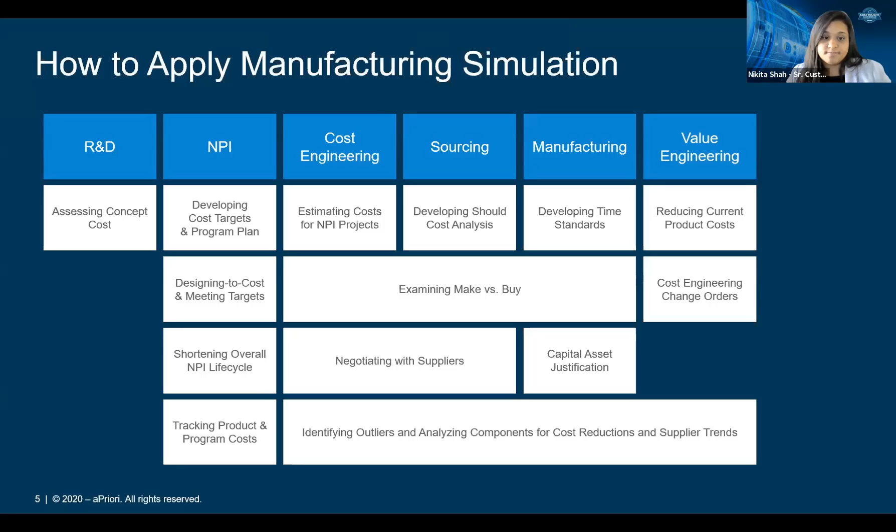Think of should cost as an additional quote from a supplier, which enables fact-based negotiation. You're too high, and this is why. Or here are my assumptions to expected cost. Let's talk about what considerations might be incorrect. You could focus on things like cycle time, machine selection, current manufacturing processes, material utilization, labor, and overhead rates. These are all now elements of the negotiation conversation.

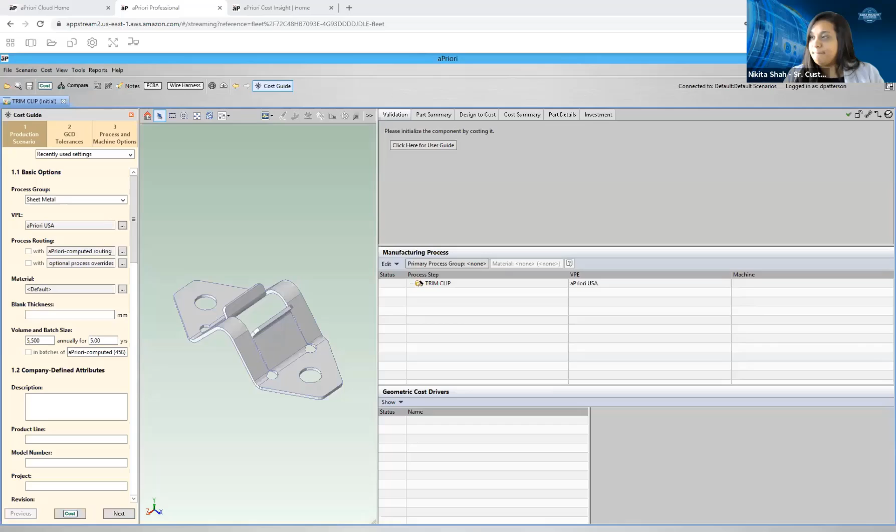Okay, perfect. So I'll walk you through the steps of generating a cost estimate with aPriori, the inputs that were required, and then walk you through analyzing the data that comes out of aPriori. So to generate a cost estimate with aPriori, all you need is the CAD file. You don't need CAD installed on your system or need to know how to use CAD. You just need the ability to point to that CAD file to generate a cost estimate.

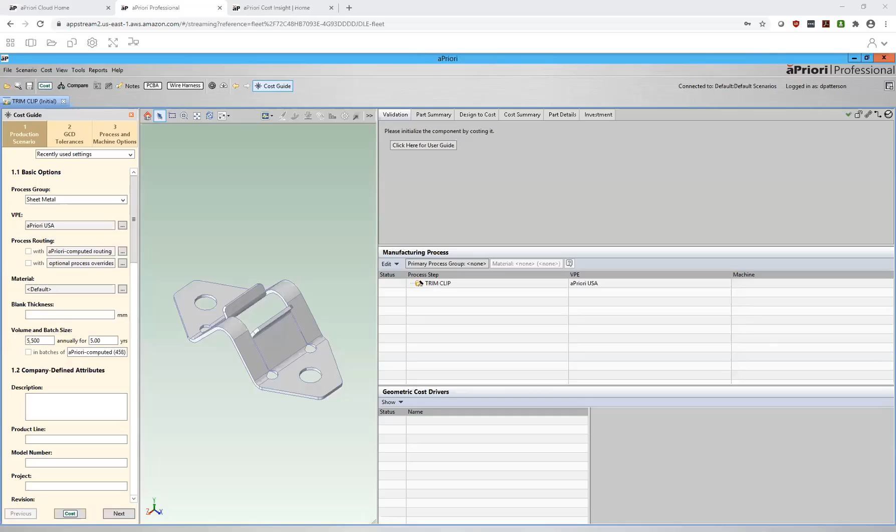So I've gone ahead and pointed to this trim clip. I'll go ahead and answer a few basic questions about the part. The first question is, what's my primary method of manufacturing this part? I need to tell aPriori if this is a sheet metal component or a casting or a plastic component, and I can easily do trade-off scenarios as well. I can look at this across process groups.

So I'll say sheet metal, and then I'll select the digital factory that I'd like to use to manufacture this component in. We have the world broken out into 79 different regions. You'll see regions in the US, Europe, Asia, Africa, and from those regional data libraries, we're pulling in the labor rates, the overhead rates associated with manufacturing in that region. This data gets updated every 90 days.

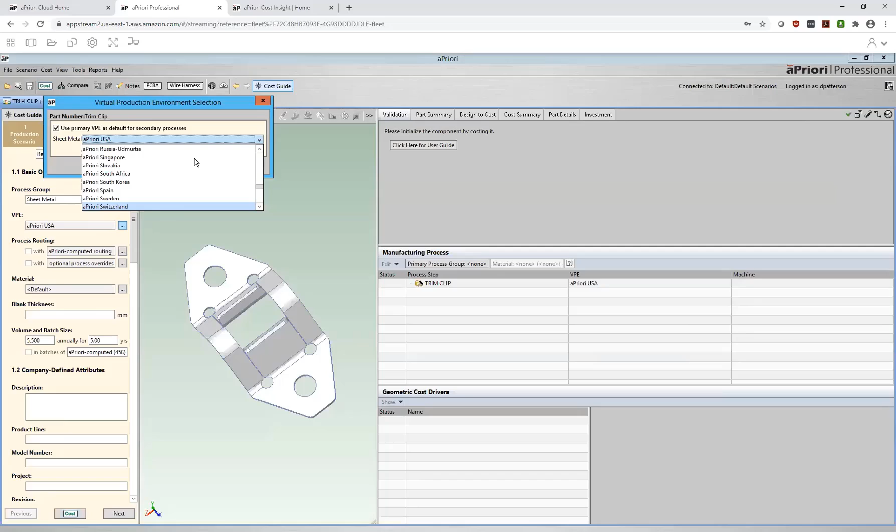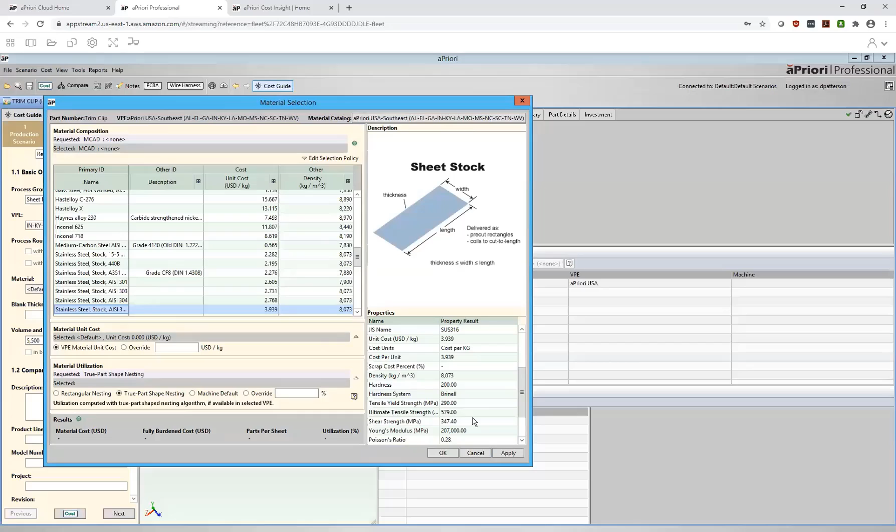If you do happen to know the rates that your suppliers are charging you, you can easily create a digital factory that represents their capabilities and their rates. So I'll say, for example, aPriori USA Southeast. I'll come in here, then I'll select my material. Let's say this one's going to be a stainless steel 316. We'll pull in not only the unit cost for that material, but also the manufacturing parameters. We'll understand the strength of the material, how the material forms, all of that automatically.

And then we'll finally say how many of these parts we want to make. We'll say 25,000 of these for 5 years. So at this point, aPriori has everything it needs to generate a cost estimate. So I'll go ahead and click cost. And what you'll see now is it's going through a geometry analysis. So it's extracting what we call geometric cost drivers. So those are the forms, the bends, each individual feature of the part.

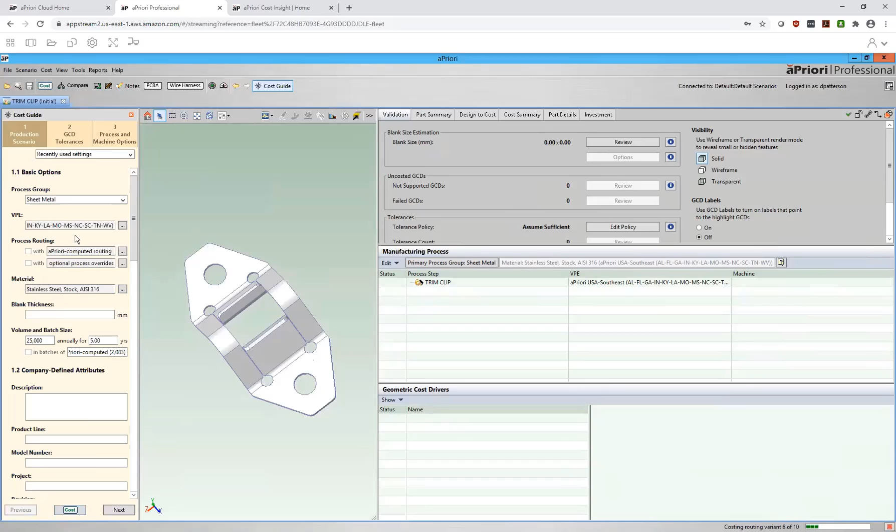Once it has those features, it then runs them through our cost models. So right now it's going through the different sheet metal processes. It's looking to decide, is this a laser part? Is this a plasma part? Is this a stage tool or progressive die? And then it will come back with that lowest cost feasible routing. So aPriori's come back with our progressive die. We picked that as the lowest cost option.

We have 8 stages. And if we look back at our routing, we can see the different options here. 37 cents for our progressive die. Our stage tool came in at 63 cents. And then we had some processes, water jet, where we just couldn't produce all the features. So we had a warning over here saying we couldn't complete the forms. So those were partial costs.

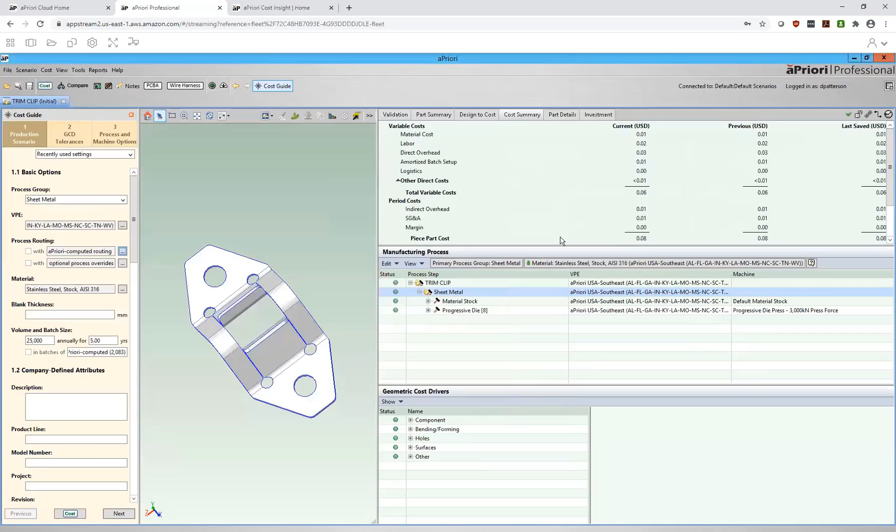If I come over into my cost summary, I can see the full detail of cost. I have just about a cent of material cost, 2 cents of labor, 3 cents of direct overhead. My biggest charge, though, is $35,000 for producing this tooling. And keep in mind, we're only running this for 25,000 for 5 years. So we have 29 cents of amortized tooling per part. So our piece part cost is only 8 cents, but 29 cents for that tooling.

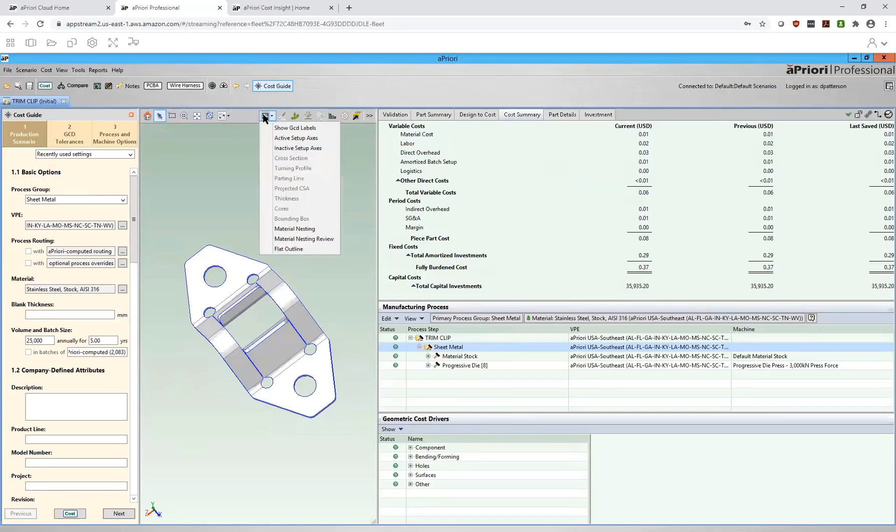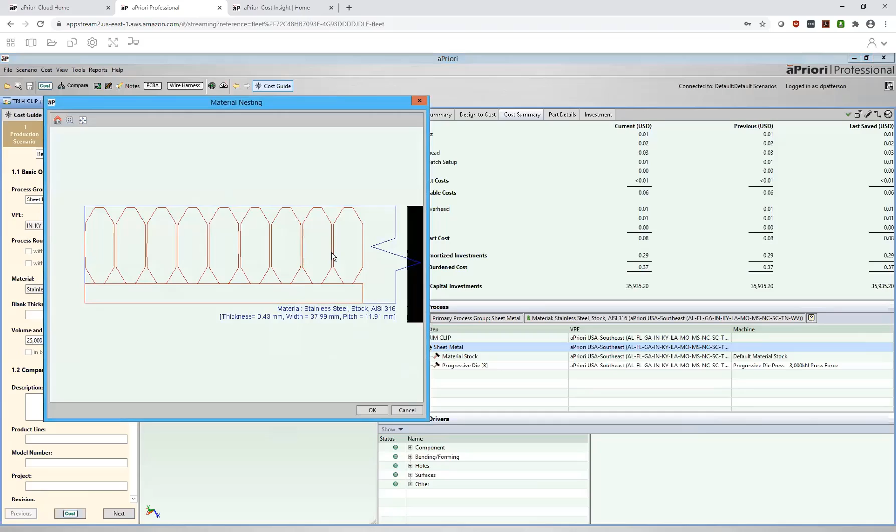If I come over and look, you can actually see how aPriori's done a full bottoms up calculation. So we've taken this part, we've automatically flattened this out. We understood how the material stretches and forms. We have that flattened blank. And then we actually went through and nested this out all automatically. So we're understanding the pitch and width of the coil. All of this has been applied automatically without the user having to make a single selection.

So at this point, I could take this part and I could use these results, or let's say, for example, we want to move this part to, let's pick a region in China.

So let's move this to the Hangzhou region of China, for example. I'll make a change here to my region. I'll select that as my new digital factory, and then we'll up our annual volume. So we're looking to do 250,000 now. So I'll recost this. aPriori will reanalyze this model and come back with an updated cost.

During this analysis, it'll also look at that tool life. So it'll understand, will one tool be sufficient to make these 1.25 million parts? Or do we need additional tools here? aPriori will do this calculation automatically for you. So it'll come back, recalculate the tooling being made in China, and then check to see how many tools would be required. So we've come back, we went from a 37-cent component to an 8-cent component.

So all of this I've been doing one-off and individually, but the same steps I can go through. I can look at this part 100 different ways in what we call our matrix costing. I could take this part and cost this throughout 6, 12 regions of the world at different annual volumes and batch sizes. I have complete flexibility to do that.

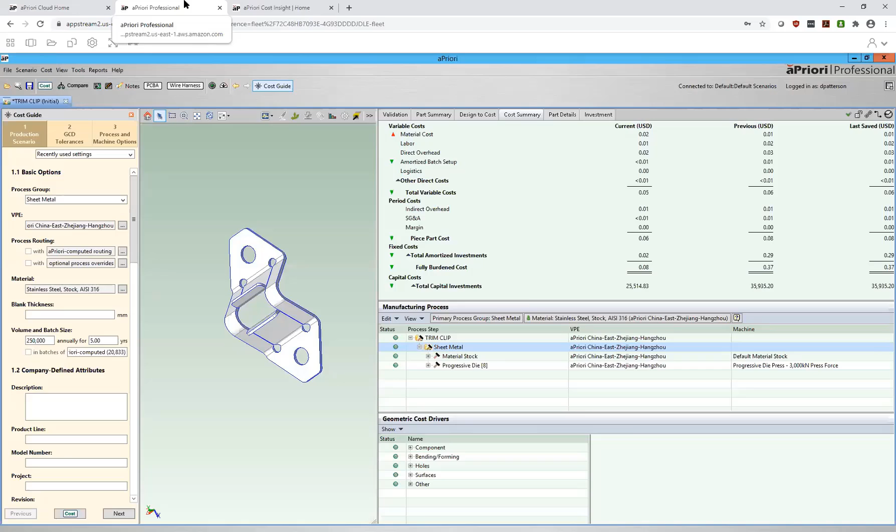I also could take 100 or 1,000 or 10,000 components and analyze them in bulk, provided an Excel-based input to say, this is my material, this is my annual volume I'd like to analyze, and let aPriori run in the background.

Regardless, once you've generated this data in aPriori, you can easily come through and analyze this at our reporting level. So to make it easy to understand trends within your data, parts that may be outliers, we have our cost insight reporting tool. So we support a range of dashboards and ad hoc views and reports. You'll see we have a starting point, but all of these can be customized to match the trends you're looking at.

So it's easy to generate a cost estimate for every single region for manufacturing, as well as additional parameters. Maybe you're looking at different materials throughout those regions. So with our cost insight reporting tool, you really can understand the trends within your data, understand the implications of sourcing based off of the actual CAD data, the geometry of the parts.

So in addition to looking at components across regions, we can also look at trends within a group of components. So if we're looking to understand, for example, certain parts, and we're looking to see what we've been quoted back for a component, we can analyze the aPriori cost versus our target cost versus what we've been quoted back. So imagine we're working on a new SUV model redesign. We're starting to go out and get quotes for this, and we can start to see where we're tracking.